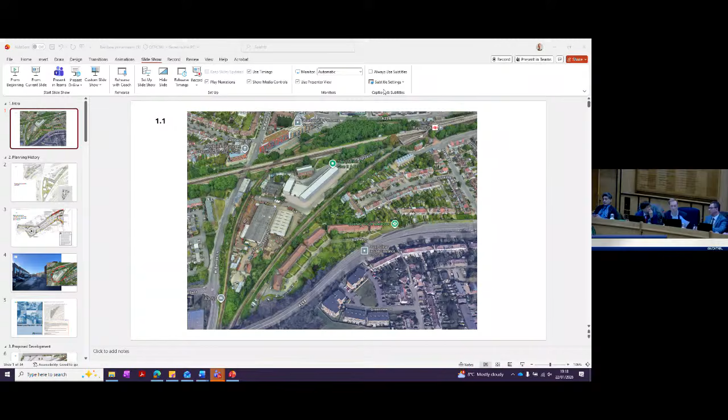Thank you, Chair. Thank you, councillors. I'll just share my screen. Okay, so the application site is Rainbow Industrial Estate, located immediately to the west of Raynes Park Station. It forms a triangular plot around 1.9 hectares in size and is entirely enclosed by railway lines. Access to the site is only possible via Station Approach, a single private road owned by Network Rail, which provides a single vehicle and pedestrian route into the estate.

The current use of the site includes a mixture of industrial buildings, open storage areas, and a set of commercial units constructed in 2019 as part of previous consents. There are no listed buildings or heritage designations affecting the site, and the site lies within flood zone 1, meaning it's at low risk of fluvial flooding. Public transport accessibility is comparatively good, with a PTAL rating of 3 to 4, reflecting its proximity to Raynes Park Station. The site is designated locally significant industrial land and also forms site allocation RP7 within Merton's local plan.

It's worth noting there's a planning history on this site. So in terms of the planning history, members should note that in 2015, the council granted planning permission for a comprehensive mixed use scheme. That earlier permission included 224 residential units, together with approximately 3,500 square meters of commercial floor space intended for B1 business uses and a smaller element of retail and community floor space. It also included a series of residential blocks ranging between 5 and 7 stories and a terrace of 9 townhouses. This consent establishes the principle of higher density residential development on the estate that remains a significant material consideration.

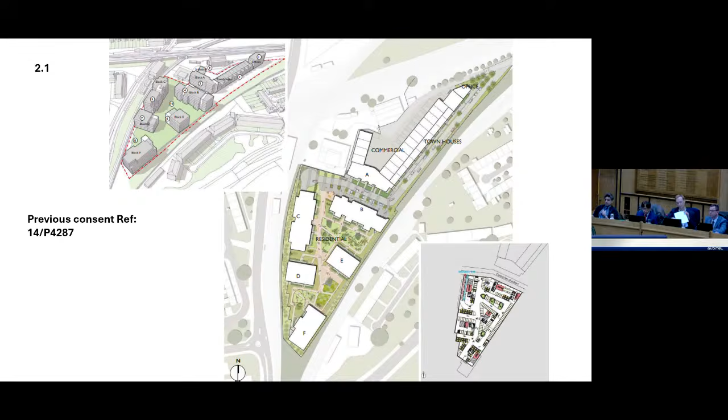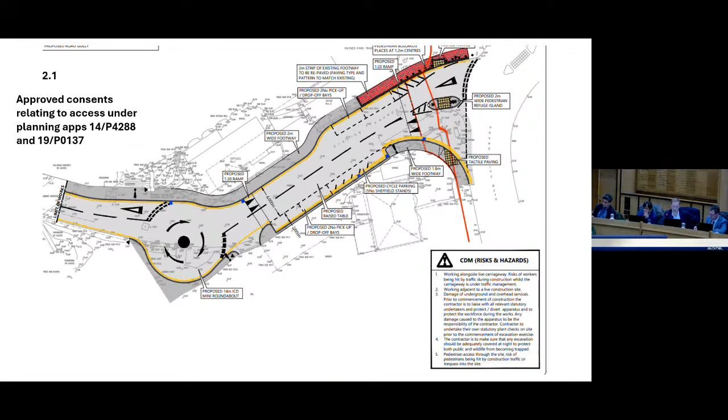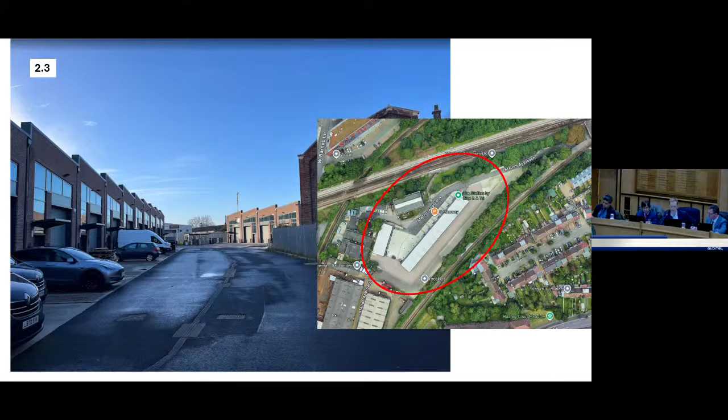A linked application was also approved in 2015. This related to works to Station Approach, specifically works to improve the access to the site, including the creation of a kiss and ride facility outside of Raynes Park Station. Further details of these access works were later approved in 2019 under a discharge of conditions application. Elements of these works have been implemented on the ground, although some remain incomplete, notably the mini roundabout just before the railway bridge. Members should note that as part of phase 1 of the previous consent, around 1,600 square metres of light industrial floor space was delivered in the northern portion of the estate. This remains operational today.

The current site allocation in the local plan is listed as RP7 and reflects and builds on the established planning background. The allocation anticipates an employment-led regeneration scheme alongside new homes and improvements to Station Approach. Members should note, however, that the changing market conditions since the pandemic have had an impact on the viability of delivering certain types of commercial floor space on this site. This has informed the wholly residential nature of the development considered this evening.

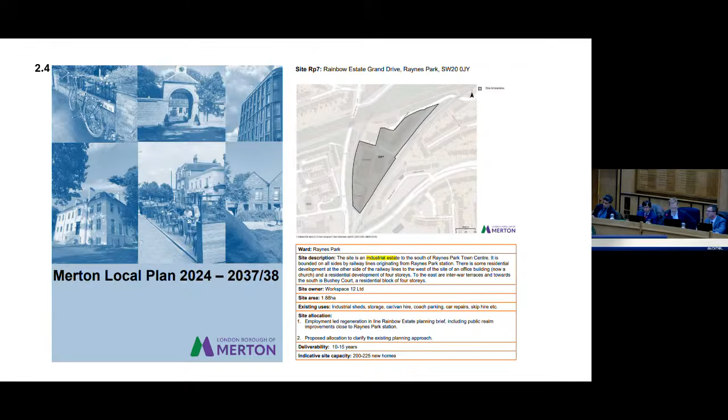So turning to the proposed development, the application seeks full planning permission for the redevelopment of the site to provide 294 new residential homes together with associated infrastructure. The scheme builds on the principles established by the previous consent, completing the transformation of the estate from industrial use to residential neighbourhood.

Development is arranged across a series of 9 residential blocks alongside a terrace of 10 3-storey townhouses. Building heights range from 3 to 8 storeys, with the tallest element located in Block G, marking the centre of the site. All buildings are arranged around a central shared open space, supported by a network of pedestrian routes and landscaped areas that create a coherent, legible layout.

In terms of housing mix, the development provides an acceptable balance of 1, 2, and 3-bed units, with 19% family-sized 3-bed homes included in the mix. While the proportion of smaller units is slightly higher, this is considered appropriate given the site's location next to Raynes Park Station and its strong public transport links.

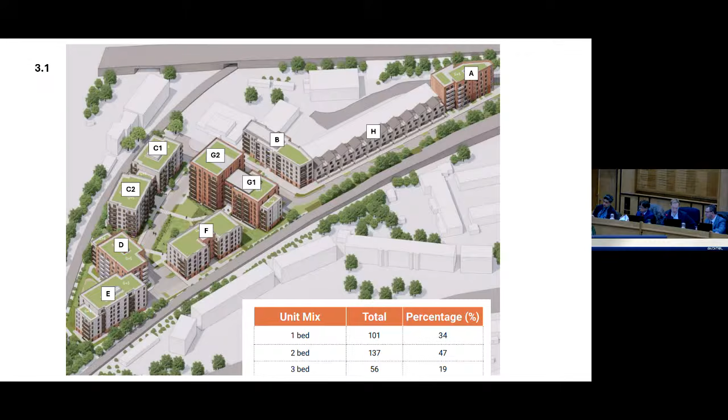In terms of affordable housing, the applicant proposes 32 affordable homes, representing just under 11% of total units. This is made up of 25 London Affordable Rent units and 7 intermediate homes. Although this is below the London local plan strategic target of 50%, the affordable housing has been tested through a detailed viability assessment and represents the maximum reasonable level achievable under market conditions. Early and late stage viability reviews would be secured via Section 106 agreement.

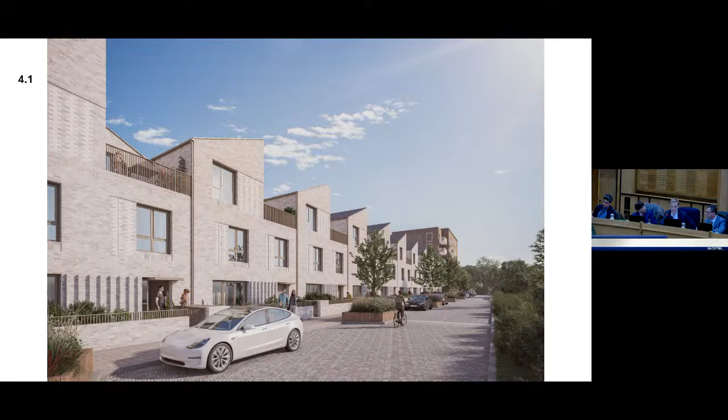Moving on to the design of the scheme, officers consider the buildings adopt a simple, robust and well-articulated brick-built architecture, which is considered appropriate for this former industrial setting, and it's also consistent with the character of Raynes Park. A carefully selected palette of pale and darker brick tones help break up the massing and create visual interest across the site. Many of the blocks incorporate ornamental brick motifs, recessed panels, and white brick framing around key openings, which give the elevations rhythm and depth.

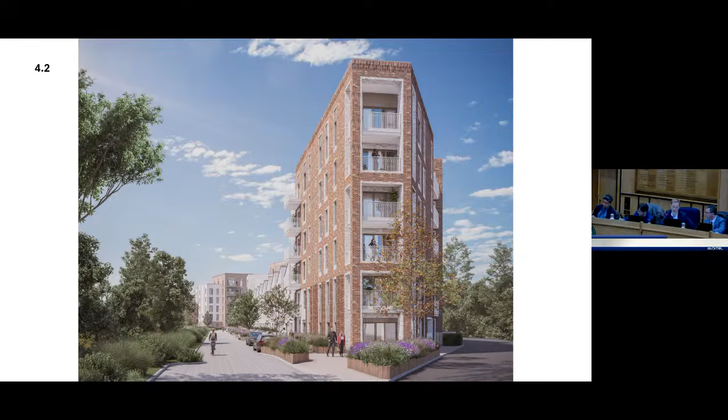Overall, officers consider the design establishes a clear hierarchy of forms, with each building having a clear base, middle, and top, helping to reduce perceived scale. This is complemented by a variety of roof profiles, including the gabled features on blocks C and F depicted here. So overall, officers consider the estate would have a good, coherent, high quality and durable architectural character.

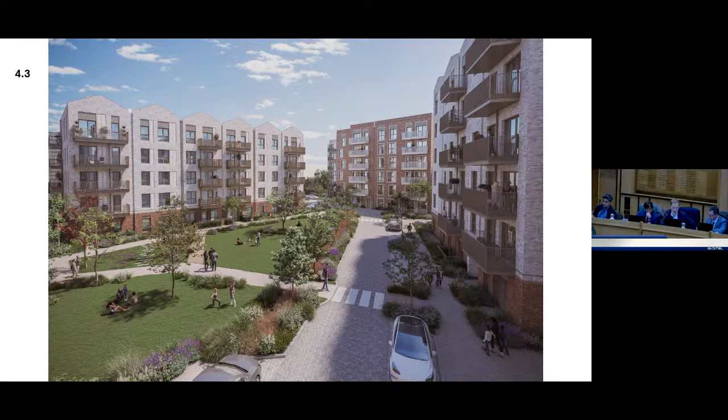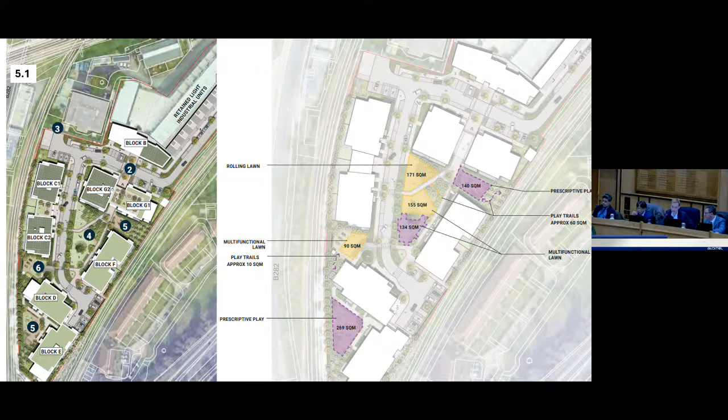A key part of the proposal is also the landscaping. So we think it would deliver a high quality environment throughout the development in terms of landscaping. This includes new tree planting, green roofs, a variety of planting zones and a central communal open space with dedicated play areas for younger children. It achieves an urban greening factor of 0.4, meeting policy expectation, and also delivers significant biodiversity net gain of over 300% compared to the existing baseline.

Officers are satisfied that the development would provide a good standard of accommodation for future residents. All homes meet the London Plan space standards with appropriate layouts for storage, and private outdoor space provided for every unit. A notable strength of the scheme is that around 70% of homes are dual aspect, which supports better natural ventilation and helps reduce overheating. The scheme also achieves acceptable daylight levels across the majority of rooms, ensuring homes benefit from good natural daylight overall. In addition, 32 wheelchair accessible homes are included with the remainder designated to M4(2) adaptable standard, ensuring the development is inclusive and accessible to a wide range of residents.

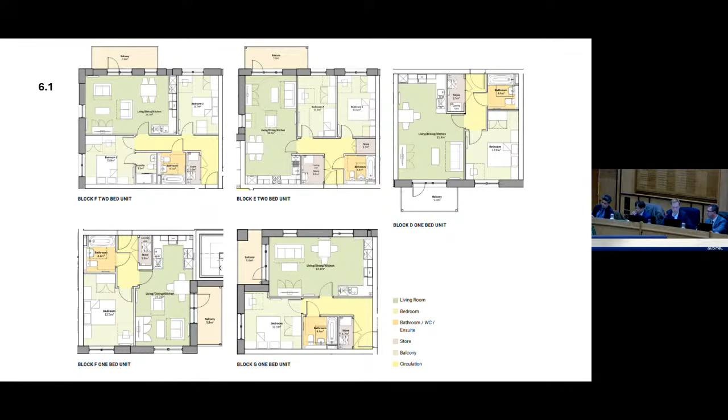In terms of neighbouring amenity, officers have carefully considered and assessed the potential for impact on nearby homes. The distances to surrounding properties are generally significant, with separations of around 20 to 40 metres in most directions, which helps limit the effects on outlook, privacy and daylight. Where some reductions in daylight and sunlight are predicted, such as for the block of flats on West Barnes Lane, these remain within acceptable tolerance levels and do not amount to material harm. So overall, officers consider that given the separation distance to neighbouring properties, the barrier of the railway and the results of technical assessments, the scheme would not cause unacceptable impacts to neighbouring amenity.

In terms of transport, a full transport assessment was submitted by the applicant, which demonstrates the number of vehicle trips generated by the scheme would remain within acceptable limits and importantly lower than levels permitted under the 2015 consent. Refuse vehicles, fire appliances and delivery vehicles have all been shown to enter, turn and exit the site safely. In terms of parking, the scheme proposes 53 car parking spaces, which is in line with the London Plan standards. This includes 9 blue badge bays, meeting the standards for accessible parking. There would also be 2 car club spaces with residents eligible for 3 years of free membership.

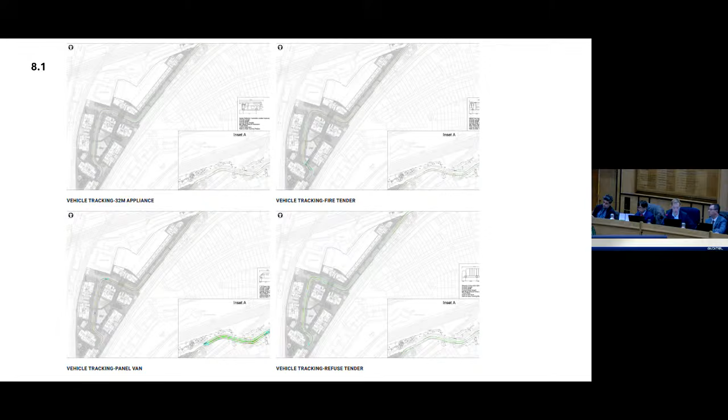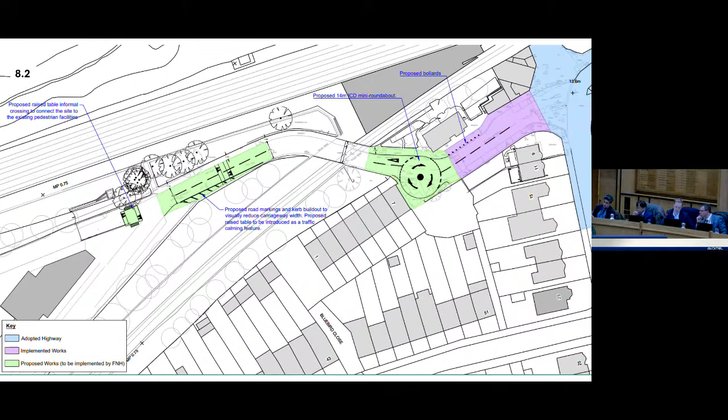In terms of Station Approach, so the access to the site, it is proposed to complete the mini roundabout at the entrance to the site. A new pedestrian crossing is provided at the western extent of the access road. New bollards and road markings would be adjusted in order to ensure the route remains unimpeded for all users.

In addition, the applicant proposes to provide enhanced lighting under the railway bridge and resurface the footway to increase safety and security. These works are secured through the Section 106 agreement and conditions and will support safe and legible access to the site. Finally, officers note many of the new residents of the proposal would use Raynes Park Station. As members are aware, there's limited step-free access at the station at the moment. Therefore, a financial contribution of £180,000 is secured towards this.

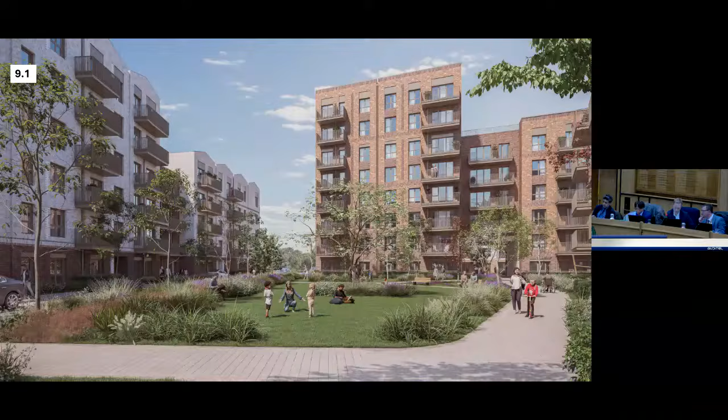So overall, members, chair, officers consider the proposal would complete the regeneration of the Rainbow Industrial Estate, providing a high-quality residential neighbourhood. It would provide 294 much-needed homes, including affordable housing, along with improved public realm, landscaping and better access arrangements via Station Approach. The development makes an effective use of brownfield land and represents a positive addition to the area. The proposal is in accordance with the development plan when read as a whole and subject to conditions and heads of terms set out in the officer report. Thank you very much.

Thank you. Appreciated a full run through. I got the order wrong when I said who was going to speak. I'm going to ask Giovanna to speak first and then ask David from the developer to speak after. But you have 3 minutes if you're ready to go. Thank you. Thank you for the opportunity to speak.

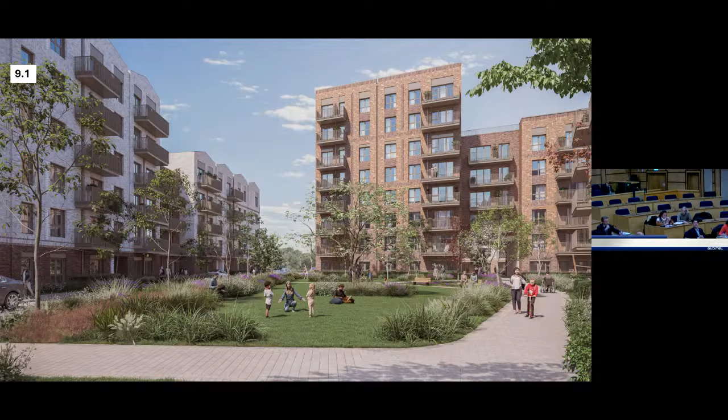My name is Giovanna Bernini, representing 67 petitioners who urge the committee to refuse this application on the following grounds: breach of policy, D12.6 tall buildings. Merton 2024 local plan explicitly prohibits tall buildings over 21 meters in Raynes Park. This proposal includes 8-story blocks. This is a direct policy breach that ignores the area's modest suburban scale and sets a dangerous precedent for future overdevelopment.

Number 2, critical access and safety risk. With 294 units and 440 plus residents, the site relies on a single narrow access point under the railway bridge. The bottleneck creates a severe risk. A single breakdown or delivery could entirely block emergency services, fire and ambulance from reaching the estate, compromising public safety.

Number 4, threat to London's drinking water. The Thames Water drinking water ring main runs directly beneath the area. Any recurrence of the significant flooding seen historically in Raynes Park poses a credible risk of contaminating a major section of London's potable water supply.

Number 5, sewer capacity and public health. The local sewer system is already failing following the 2025 removal of U-bends to prevent blockages. Foul gases are now venting at Grand Drive and the station. The current network cannot cope with light industrial waste from 75 people. It will certainly fail under the pressure of 440 plus new residents.

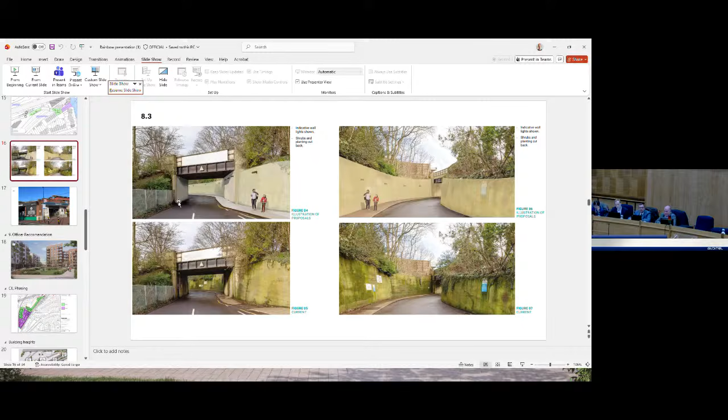Yes, so I'm taking your point. I will ask the applicant to respond to that, and also whether you would include a commitment to CCTV as part of the application. Well, first of all, on the lighting, you can see on the screen there, the actual marks along the viaduct wall, they are indicating indicative lighting. So we're proposing wall lighting that will be low lit, environmentally friendly.

In terms of CCTV, yes, it's something we can explore at the entrance and at certain points along that section. Something we could discuss with the Secured by Design officer as well, as also a condition secured in the permission for that. Thank you. Any other questions? Or are you moving on to comments now? No, I've got several questions, but if I can maybe intersperse. I haven't got like 1,000 more.

On the theme of CCTV, because it was in the Designing Out Crime report that we recommend a CCTV strategy. Building B, I don't know if you've got a map. There's quite a thin corridor behind Building B, which to me just shouted out ASB because it backs onto the existing commercial. So there's like a slither. You can't really see it on that map, but the footway entrance is between the terraces and Building B.

Is that just basically going to be used for a fire escape and that type of thing? And could there potentially be some sort of CCTV there just due to the levels of ASB around the station as it is at the moment? Thank you. I think we can include that in anything we put into any condition, if it's agreed, where the CCTV should be. Or are you actually asking for that now?

It could be an advisory, I suppose, in regards to CCTV. We can't make it a condition, it's not necessarily reasonable. We would advise CCTV along the bend as recommended by Councillor Foley, and in the gap by Building B as recommended by Councillor Willis, something like that. Build that in. That's what the committee agrees in the end. Thank you. That would be acceptable, Chair. Okay. Councillor Gillier.

Two little ones. I didn't see mention of Swift boxes, and in the absence of Councillor Hicks, I know she loves them. Is this a development that asks for it, and could we have that? And then my actual question is, I noticed some comments about the bin storage and the cycle storage being restricted, although when I looked at the plan, they didn't look restricted. So are you, the planning officer, happy with that layout?

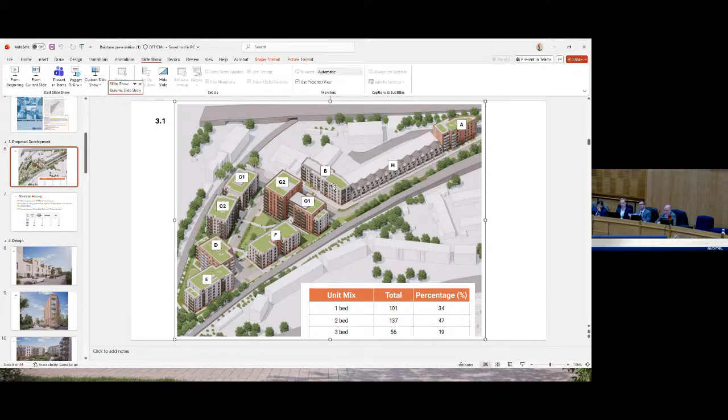Comments. Councillor Foley, Councillor Willis. Yes. Thank you, Chair. Yeah, my comments on this, I'm afraid it's the usual one I say about the parking. I know it satisfies the London Plan, and I just need to say it because I wish developers would fit in more parking. I think it makes them easier to sell. They get more money for them. They're easier to rent. The social housing, that's a shame, but I'm hoping that perhaps maybe the council will buy a block. Who knows? But it is a big development.

But I also think, having lived in Raynes Park myself many years ago, over 30 years ago, I've known this site, and it is ripe for development. And it's a shame it's only got that access road. Looking at it, I think the developers have done a very good scheme. Again, I know I've had my reservations about the parking, but I'll be supporting it tonight because I think it's a much better use of the site. I do have those concerns. I'd love parking, but you never get 10 out of 10. But it ticks a lot of boxes, and that site needs something doing to it. This is much better. Will be good for Raynes Park, I think. So yeah.

Thank you, Chair. Some of my comments are similar. It's amazing that London continue to put policy in that just isn't realistic to residents. For example, that whole stretch of Apostles is CPZ, and residents have said if you only put 53 car parking spaces in, then all of their evenings when the CPZ doesn't apply is going to be a nightmare. So actually, you'd be pleased that there are still 53 car parking spaces in the application, because TfL in the report says they would have been quite happy for it to be car free completely. So thank you for including those car parking spaces and the 3% blue badge spaces.

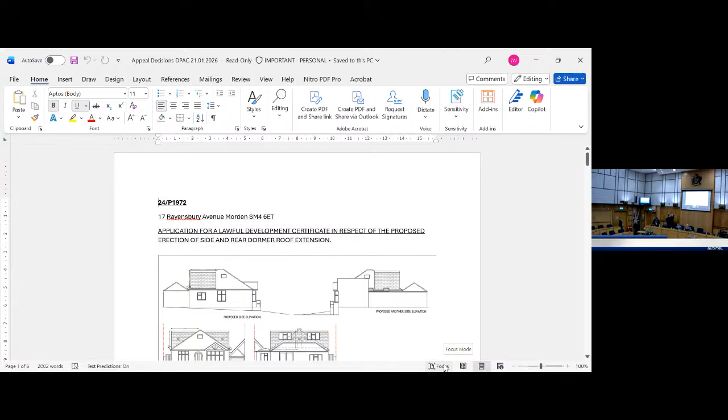Item 6 was planning appeal decisions. We'll get ready for those in a moment. Thank you. Jack, could you put up that document? Can I call us to order now for the planning appeals report? I'll ask to lead on that. I'll present this, Chair. Yes. Thank you.

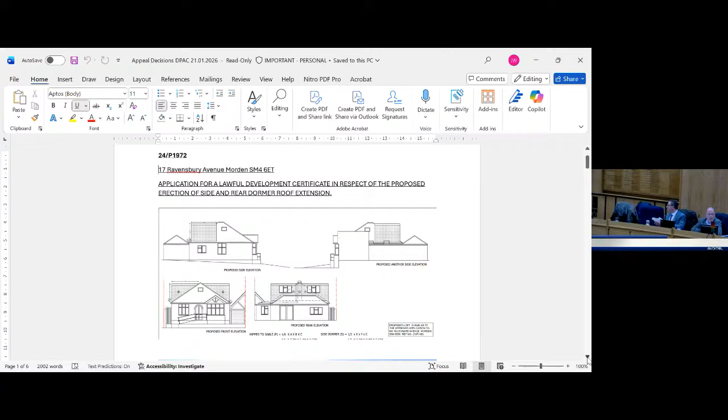So the overall position with the appeals this time around, Chair, is really good. We had 7 decisions. They were all in respect of officer made delegated decisions. There's no learning for the committee as such, but we won 5 of them, so that's a good proportion. And the 2 we lost are quite interesting, really. I'd be quite intrigued to know what members think, actually.

So the first one was for a lawful development certificate to carry out the works that you can see on the screen, the shaded works to extend the roof. And to us, that looked really quite substantial. And we came to the view that to accommodate those extensions, that's tantamount to a new roof. You're looking at basically a whole new construction of a roof, in which case we shouldn't grant a lawful development certificate,

because a lawful development certificate can only be granted for genuine extensions, and if it is a reconstruction, then that needs planning permission. So it wasn't as though we were necessarily going to refuse the development in the end, but we didn't think it should be a certificate, we thought it should be an application. And the inspector disagreed and thought that could be done as a genuine extension. So it's a technical point, really, but the certificate was allowed, so it can be built.

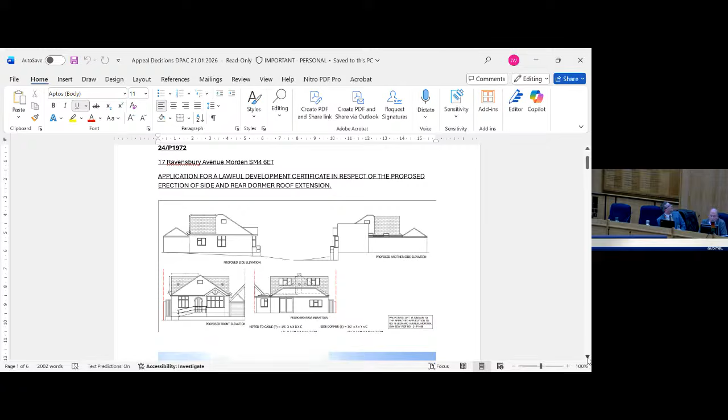So we'll just have to think about our learning there and perhaps bring building control in next time. But to us, it's a brand new roof. But well, I think we'll just maybe disagree on that one. And if you could scroll down, please, Jade, to the other plans.

This is it. Yeah. So this was at 150 Streatham Road in Mitcham. Now, members can see the outbuilding there that's highlighted with the red outline. There are 3 images there of a proposed outbuilding in the back garden that would have been separated from the main dwelling and an attached rear extension to it. This outbuilding would be 3 meters high to the ridge.

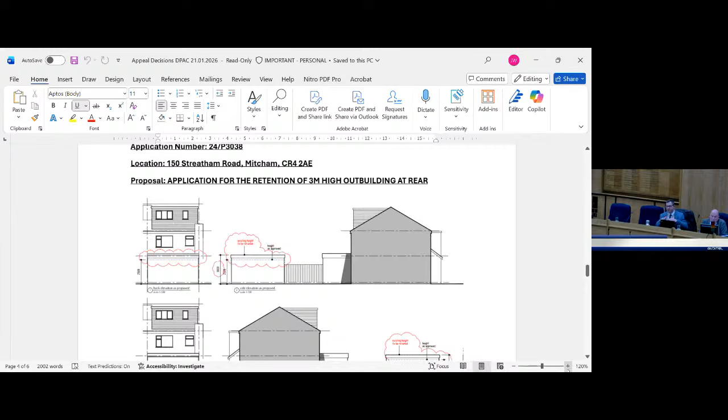Now there is an outbuilding next door that is 3 meters high, but that was to the top of a pitched roof, and we thought that if this was to go 3 meters high, there should be a pitched roof there as well, and that the 3 meter point should be at the very top ridge line of that. But the inspector disagreed with us and thought that a flat roof up to 3 meters high would be acceptable. So that was a difference of opinion as well. We thought the design could be better, but the inspector decided that was acceptable.

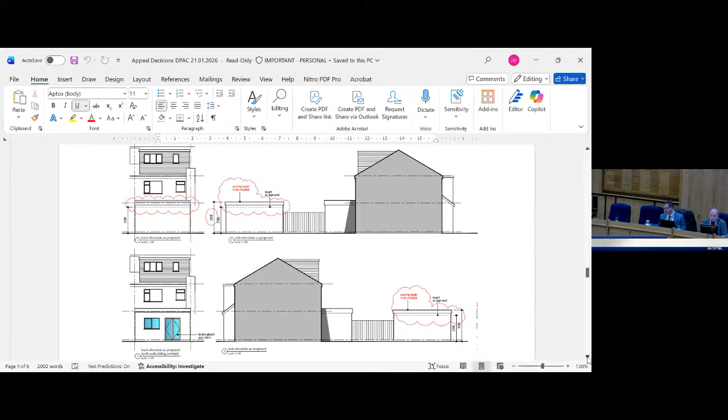So again, it's another experience where the inspectors seem to be allowing more now in terms of house extensions and outbuildings. So if we get another one of those, we'll have to consider that in the context of this decision. So they were the 2 main issues arising from the appeals, Chair. Comments on those? Councillor Hayes.

Thanks, John. I'm loath to raise it at such a short meeting, but is there any way of a guideline on these extensions on the backs of houses? As you know, Gravelly, we had a reputation of being HMO central, and there's still quite a few of them where they're just completely separate buildings. Is there any kind of guideline we can get on these, if you understand what I'm saying?

It's a really good question. It's something that we've been looking at very carefully, actually, and we've now got this set out. But some outbuildings, you see them and you think, yeah, that's a genuine outbuilding. They're going to use that as an ancillary office or whatever. Okay, it's got a small bathroom in there, but you can see it's genuinely going to be for incidental purposes. Some outbuildings, you can see that there's basically everything in there, and potentially there's an access that could go to the back, and essentially you think, well, this could be heading towards an independent unit here.

So what we're trying to do is we're looking at what rooms are being provided, the size of those rooms and the size of the outbuilding in its entirety. And if it's above a certain threshold, then if we believe that something looks like it's going to be genuinely incidental and stay that way, then we would secure that via a condition. But if we think that it may go beyond that, we're actually asking applicants to sign up legal agreements so that if they were brought into use as an independent unit, potentially you could serve an injunction against that.